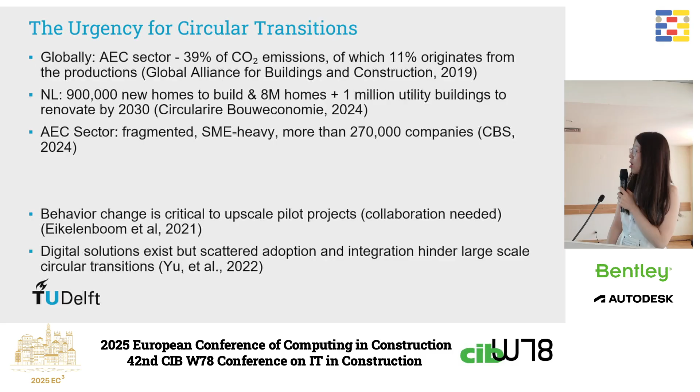For the building sector only, last year we had more than 270,000 companies. And in order to upscale the circular pilot projects that we now are experiencing, we do need to see behavior changes. On the other hand, digital solutions exist, but they are scattered in adoption, and the integration of these digital solutions is not well received and hinders the large-scale circular transitions.

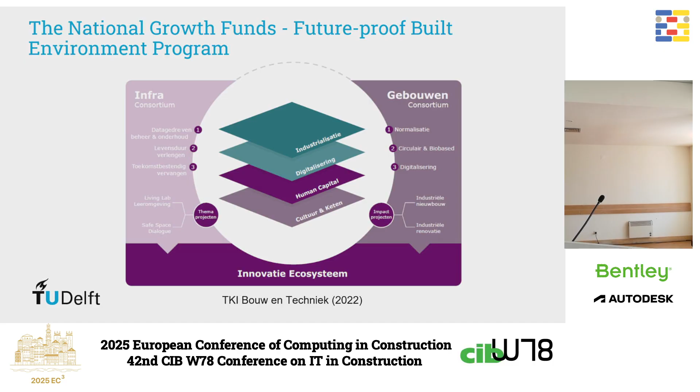So that's how this National Growth Fund initiative started, and we are participating in one of the programs, which is called the Future-Proof Built Environment Program. As you can see here, we have 3 different consortia. One is the building consortium, one is the infrastructure consortium, and the last one is the ecosystem consortium. For each one of these consortia, we have a different focus. Our project is located in the building consortium, and we focus on industrialization and also digitalization. But for all these different consortia, we have the digitalization layer involved, which serves as the backbone of the whole program.

We have done an extensive feasibility study and business process modeling approach for the facade industry. And we do see that even though we have a lot of digital tools available, they are not well integrated. Think about the manufacturing of the building products, but also the building sector, the construction sector, and how they are connected these days. We also see that there is a lack of incentive for the manufacturers to exchange information with the AEC sector, which is very much needed for the circular transition.

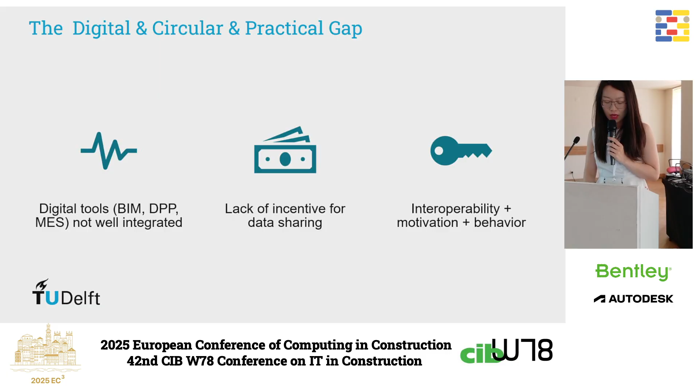With all these interoperability issues and the lack of motivation and this kind of long-hanging behavior for the traditional way of working, that hinders the transition. And we see that potentially a serious game could be of help. Serious games are grounded in experiential learning and behavior reflection. So we try to design a serious game to bridge these digital developers and the circular supply chain actors together, because we see 3 challenges.

One, the digital AEC solution providers need to understand the process of production, remanufacturing, recycling of the building products manufacturers. On the other hand, the manufacturers need to have more awareness that if they share data with the building sector, then certain things could be enabled for circular reuse, remanufacturing, because otherwise they don't know how they can disassemble it, for example. We also see another challenge, that even if you have pilot projects, they're not upscaled. So there is a lack of continuous learning. So we think that we need to foster continuous reflection for better collaboration.

So we are going to design this serious game based on a facade use case, because as I mentioned, we have already studied the business process extensively, both the as-is process and also the to-be process in relation to the circular transition.

The objective of this serious game is to capture the multi-stakeholder complexity by using role play, and stimulate collaboration and see how they negotiate during this role play, whether they can make certain transactions. We also want to reveal that there are certain information and data sharing gaps in the play. And as I mentioned, we also want to foster reflection so that we can design better to-be scenarios. But it sounds very abstract, so I'm going to show you how it is designed.

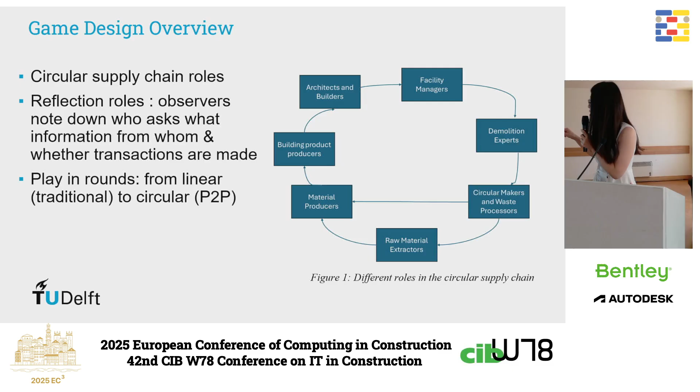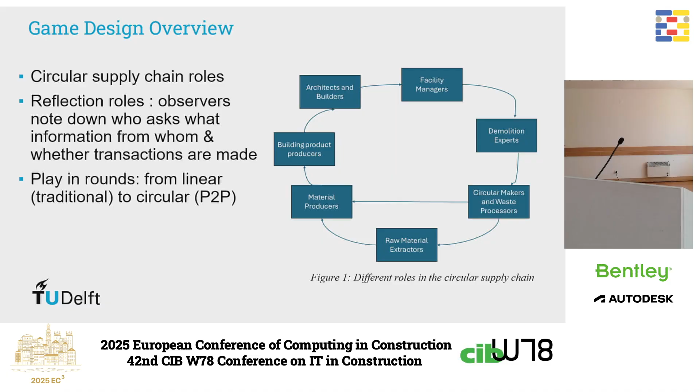In addition, we also have a reflector role who observes what is happening during the role play and writes down what information is asked from which person and whether a transaction is made. And we played 2 rounds. In the first round, we tried to mimic the linear traditional way of working. So each role player is only allowed to move 1 station up and down. They are not allowed to talk to whomever they want. In the second round, we try to mimic the circular peer-to-peer interaction. So they are allowed to talk to each other, no matter which station they are allocated to.

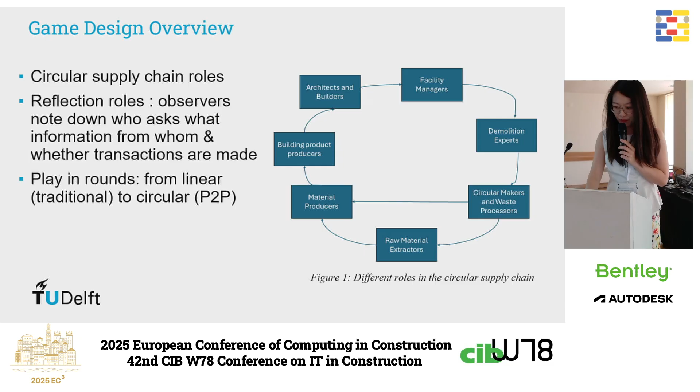And something to mention is that for this testing environment, most of the participants are from the digital solution providers, and also the standardization and research institutions. So the focus shifted a little bit more towards letting them understand what the manufacturers do. So their first task is to understand what the daily tasks of the manufacturers are, and also for the circular supply chain, how do they recycle and what they need to consider, like the CO2 emissions, and those types of things.

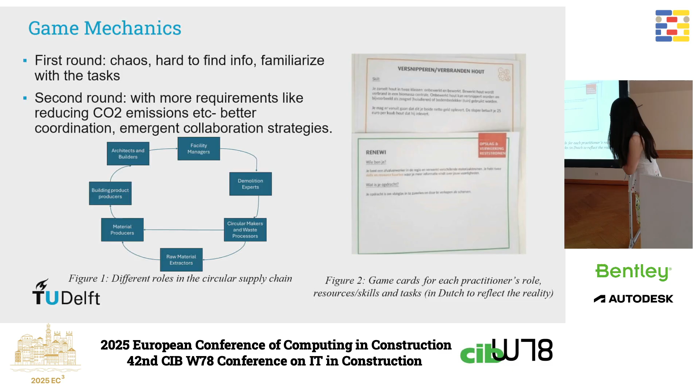And then in the second round, as I mentioned, they are allowed to talk to each other, but also we introduce more requirements. Like this round, they need to consider how much CO2 emission you can reduce if you make certain transactions. And it's very interesting to see this kind of interaction because for each role you have what you need to do, your task. Like I need to produce 100 window frames from raw materials or from reclaimed materials. But they need to make decisions like if I do this, how much would that cost me qua cost and also qua environmental cost. And then they have certain skills and they also have certain resources to spend.

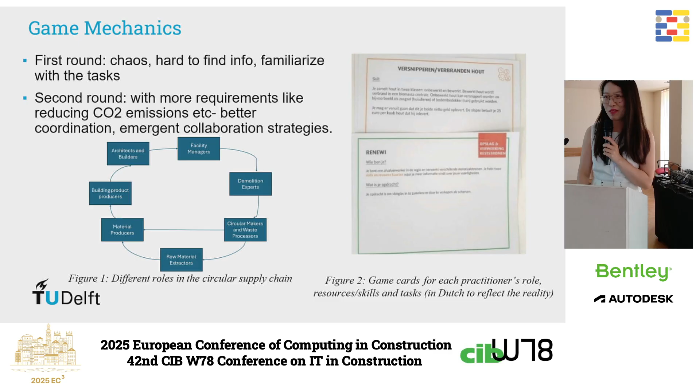We see some key findings, like during the second round, they are more aware of what they need to do, and also they understand that sharing data could encourage them to make better transactions more easily. Without sharing data, the transaction costs would go up. But also we see some shifting of power dynamics. If a certain gateway person or role is holding the information back without letting others know, then certain transactions cannot be made. And we also see the emergence of new roles, like information intermediaries, like the gateway person, or new roles like the digital platforms.

But we also see that there are missing actors, like reverse logistics. Suppose you talk to an urban miner and say, I want to produce 100 window frames, and the urban miner already has 100 window frames in good condition, then you can already get them without going through all these supply chain actors. However, they mentioned we don't have a reverse logistics facility, so we cannot do that. If you want to do it, you need to arrange it yourself. So we see some actors are missing in this process.

But of course, in the end, we can also reflect that certain things could be intermediated, but then after a while, they could also be disintermediated. Like certain roles are not needed anymore, like warehouses, if you can directly get it from the client or from the donor buildings.

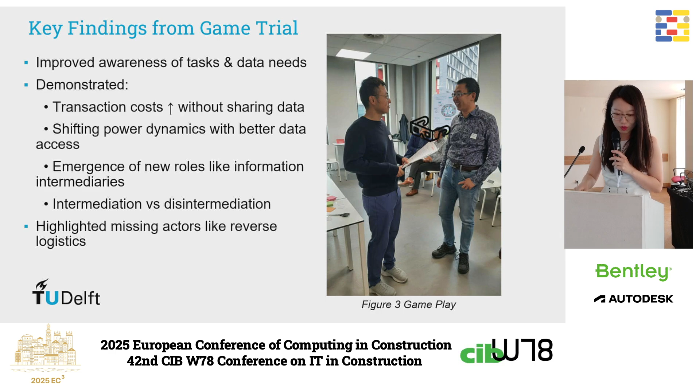So reflections on learning: we see that in this simulated environment, we can observe certain behaviors, and also strategies are emerging. We try to facilitate role play by understanding each other's needs and the daily tasks of each sector. And also we revealed the practical gaps, like standards for digital product passports, which are still under development and going to be put into place. But for certain things, like how you disassemble things and how you design this kind of logistics process, it is still missing. And we see that serious games could help further improve the system design for to-be scenarios.

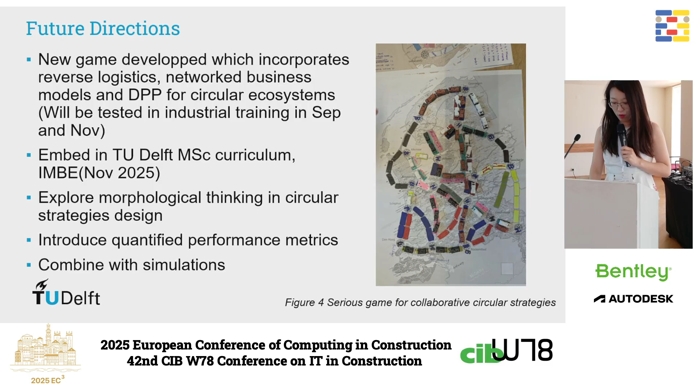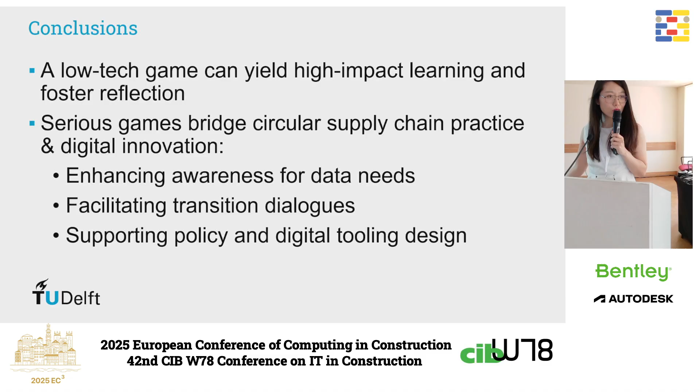To conclude, this is a low-tech game, but we do think that it can yield high-impact learning and foster reflection, which is very important, and enhance awareness to share data with each other and facilitate transition dialogues. But of course, this is not a one-time thing. We need to continue doing this to really make concrete agreements with the supply chain partners on how we want to achieve this together.